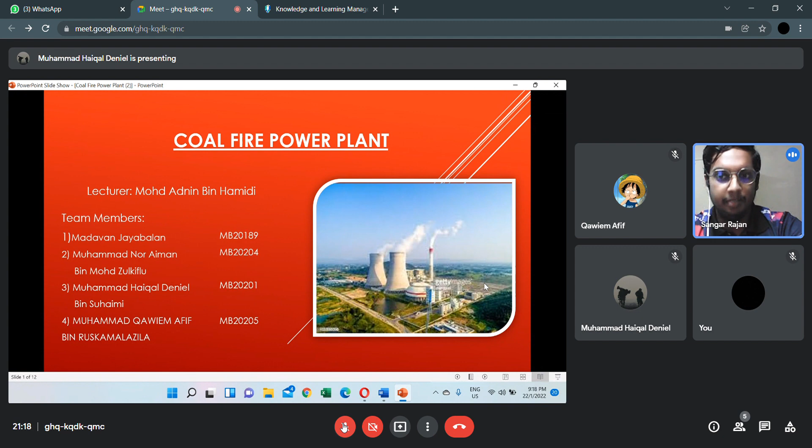What is coal and what could it be used for in our daily life? Coal is a combustible material with a high amount of carbon and hydrocarbon. Now let's talk about the utilization of coal in everyday life.

The benefit of coal most closely related to human life is as a source of electricity generation. According to records from the Ministry of Energy and Mineral Resources, domestic coal consumption, also known as the domestic market obligation, reached 121 million tons in 2020, with the largest use supplying steam power plants (PLTU).

Next is the production of gas. The second benefit of coal is gas production, obtained from coal still in the ground.

It can also be used for the aluminum industry. This material is obtained as a byproduct of the iron oxidization process in steel industry activities. The benefit of coal for other industry activities is to help the steel product industry, which is known to play an important role in everyday human life.

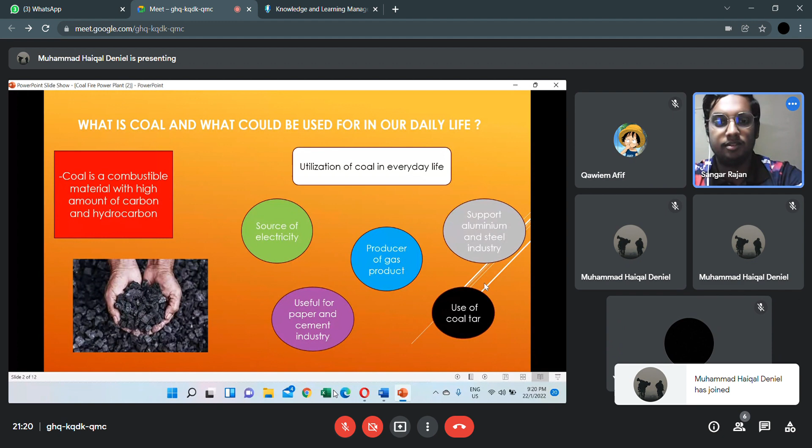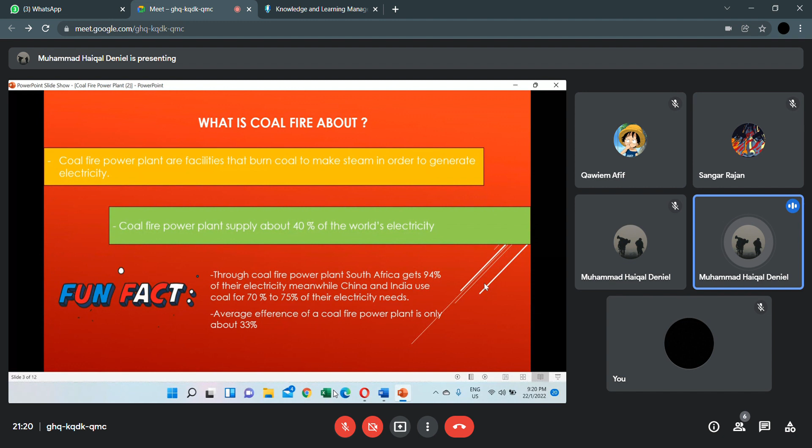Okay, thank you Madhavan. So what is coal fire about? Coal fire power plants are facilities that burn coal to make steam in order to generate electricity. Coal fire power plants supply about 40% of the world's electricity. Fun fact: through coal fire power plants, South Africa gets 94% of their electricity, meanwhile China and India use coal for 70% to 75% of their electricity needs. Average efficiency of a coal fire power plant is only about 33%.

Next, I will continue to Aiman.

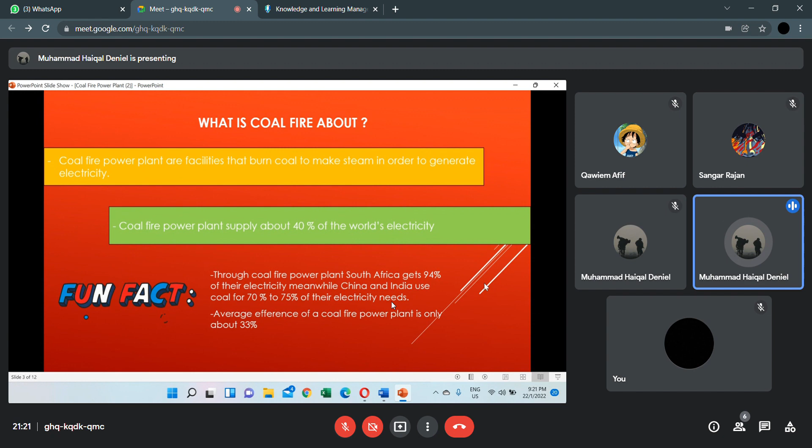Okay, thank you Haikal. Background of the power station: the name of the power station is Sultan Salahuddin Abdul Aziz Power Station, located in Kapar, Klang, District Selangor, Malaysia. The owner, Kapar Energy Ventures Sendirian Berhad, is a joint venture company between Tenaga Nasional Berhad (TNB) and Malakoff Berhad, with an equity holding of 60% TNB and 40% Malakoff Berhad since 9 July 2004.

The amount of electricity produced is about 2,420 megawatts, which contributes about 15% of the total electricity production facility in Malaysia. Okay, next.

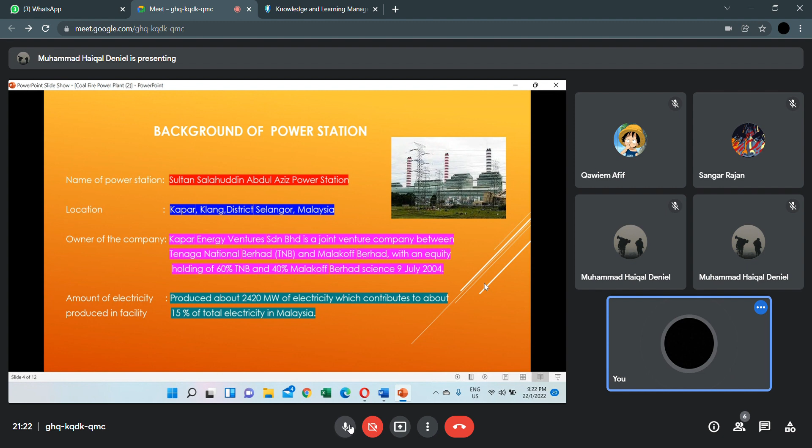Besides that, it has a lower carbon content, high moisture content, and crumbly texture. Our country gets coal from Indonesia, because it's the world's largest exporter.

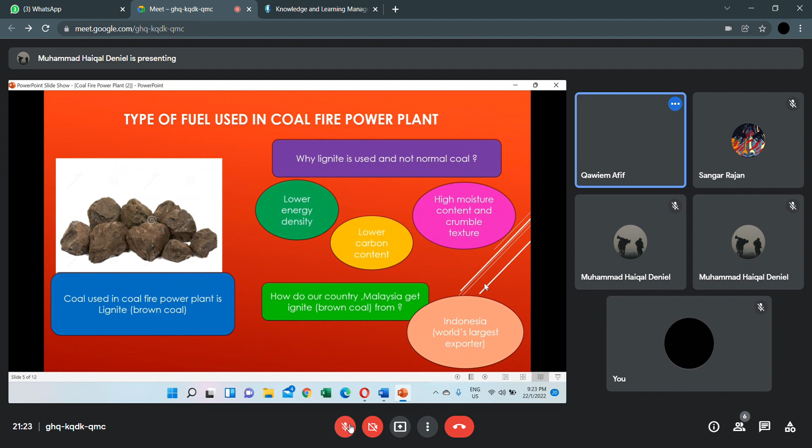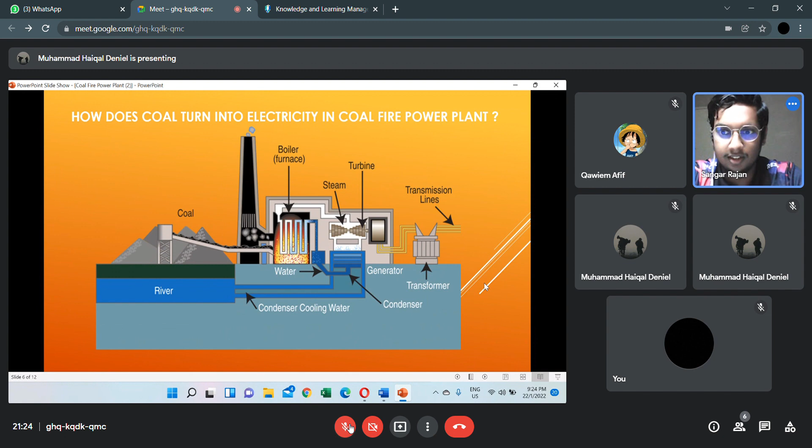I would like to continue this presentation. As you can see in this diagram, this is the process of how coal turns into electricity. First, it goes from coal, as you can see in the slide, to the condenser cooling water, and the water will be condensed. Next, through the water, it will evaporate, thus turning the turbine inside, and the coal, as you can see, is being heated up inside the furnace. I would like to go to the next slide.

Now you can see how coal turns into electricity. I will start the proper process, which is first the pulverized coal is input into a boiler where combustion occurs and the coal provides heat to the power plant.

This heat is transferred to the pipe containing high pressure water which boils into steam. The steam then travels to a turbine, causing it to rotate at extreme fast speed, which turns into electricity. Now I would like to pass to the next speaker.

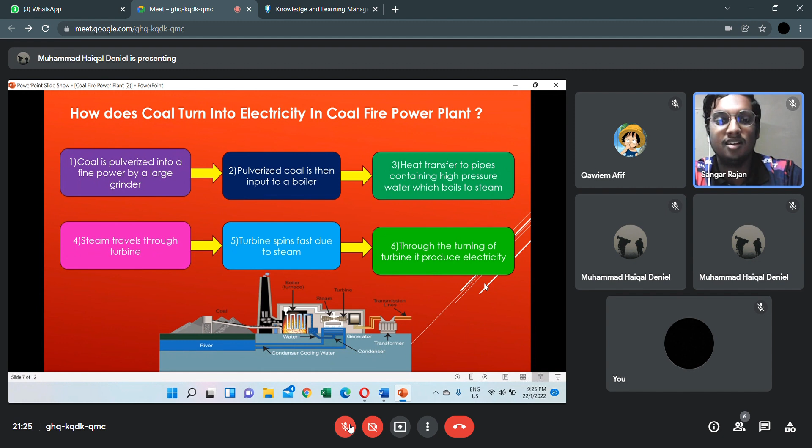Okay, thank you, Medever. How's the energy transfer of a coal power plant? To produce electricity, coal is needed. Thus, coal could be classified as chemical energy.

The next energy transfer will be thermal energy as the heat from the coal will evaporate the saturated water, thus changing it into steam. After thermal energy is mechanical energy as the turbine will spin rapidly to generate electricity, and the turbine is a mechanical part made by humans. Lastly, electrical energy is produced.

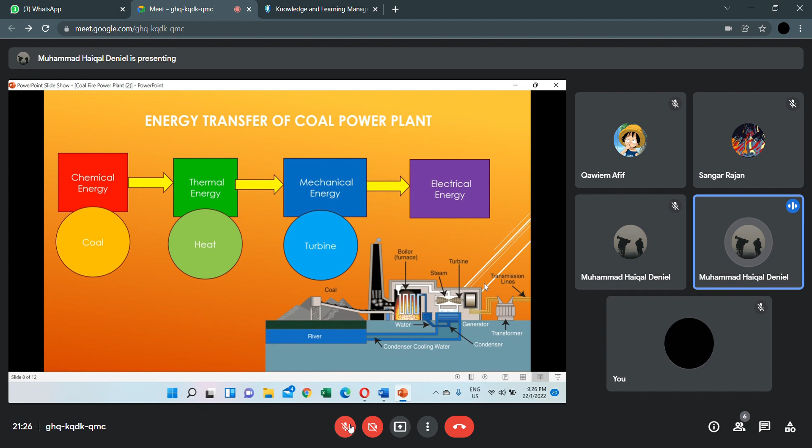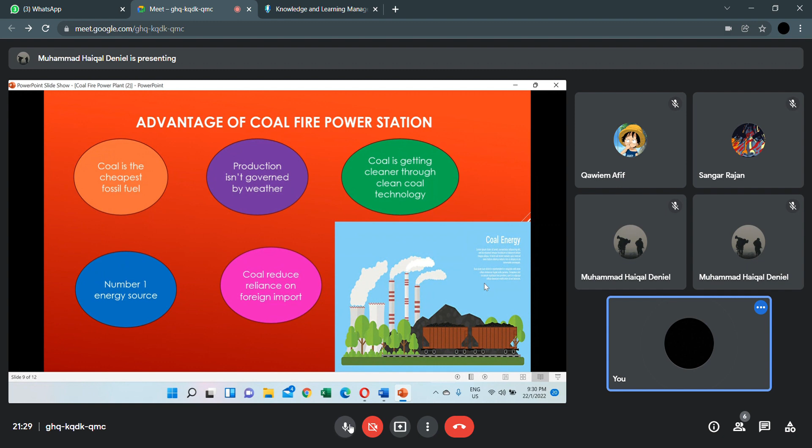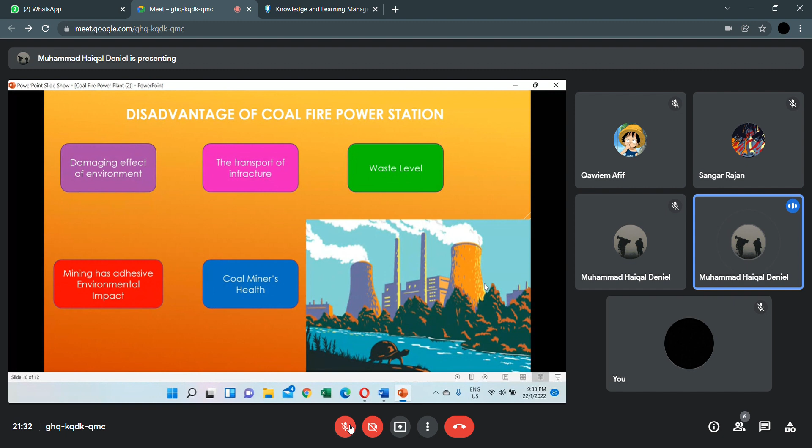Coal power is the foundation of our infrastructure. Surface coal has been used for heat for centuries. By the 1600s, we began to understand the combustible nature of coal and the energy it produces. The advantages and disadvantages of coal prove that we have made massive technological advances when it comes to this abundant and affordable resource.

However, there is still a long way to go to minimize, if not eradicate, the damaging effects coal causes to our environment and its inhabitants. And that's all for today. Thank you.